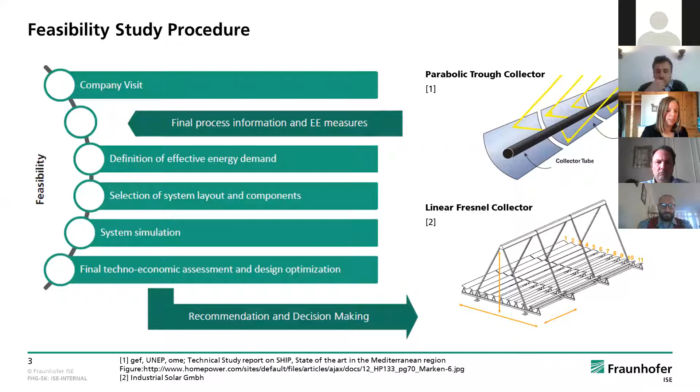We are focusing here on parabolic trough collectors and linear Fresnel collectors for concentrating solar heat, specifically for steam generation. This was being looked at in Tunisia. We had these two companies: one dairy plant in the center of Tunisia and one textile plant in the north of Tunisia. The technical parameters were actually quite similar, an annual energy consumption of 20 and 24 gigawatt hours, and 50% of this energy consumption was used for thermal processes.

The steam temperature is 170 degrees, the steam pressure 8 bar. In the schedule, there's a small difference. In the dairy plant, we had a 7-day per week operation. In the textile plant, we have a 6-day per week operation, and we will see later that this also affects the results. And a big difference is the current energy source and the energy price.

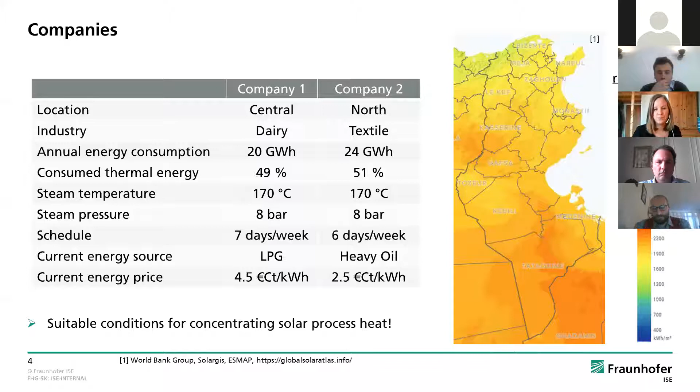So we considered a lifetime of 20 years, solar field cost of 450 euros per square meter, a discount rate of 8%. And then, and this was special to this study, we varied the amount of incentives from about 20% to 80%. So we had a lot of different scenarios for the different companies and the different incentive programs, and created analysis, like a design optimization for this.

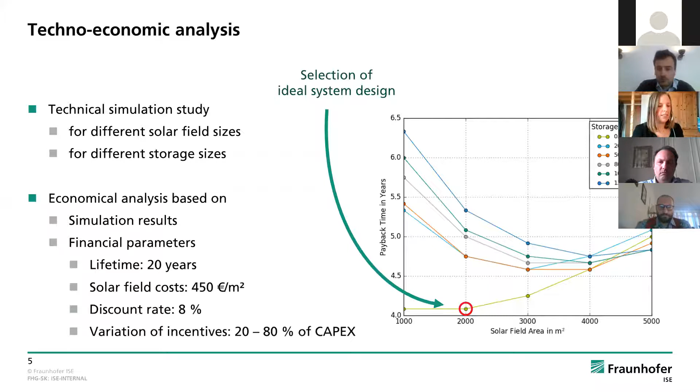And this is what you can see on the right-hand side. On the x-axis is the solar field area in square meters, on the y-axis the payback time. And the different colored lines are the different storage sizes that were considered. And with this, we could easily see in this graph what the ideal system dimension is in order to get a good payback period. And this is what we did for both companies for different scenarios of incentives. And this created a lot of different plots, and I will spare you looking at all of the different plots. I will just show you the results of this study.

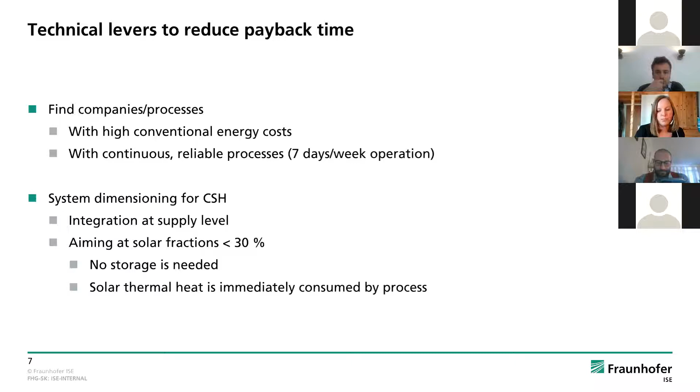Okay, so finally, Tunisia shows very suitable conditions for CSH. We see that projects are definitely possible and feasible. The payback times can also be low, especially if we consider high incentives. Yet they are often not low enough for industrial companies to really take decisions. And financial mechanisms are important to resolve the remaining risks for the company.

So this can be ESCO models. I think we will hear more about this later. Also funds that are maybe also specific to solar thermal technologies. Then we can reduce the project evaluation costs, or also create funds and programs that take over this effort. We can implement the incentive schemes as said, and the idea behind all of this is in the end to create also a larger market volume and therefore bring down the cost of CSH, and this will also of course improve the decision-making process for the companies.

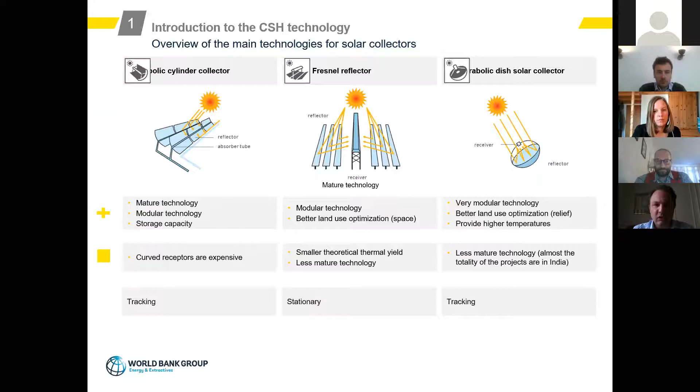I will say a few words about the way the CSP MENA KIP program captured the CSH opportunities in the MENA region. I won't go through some of these slides, which are basically just a presentation of CSH technologies. Some of these slides have also been shared earlier on in the sessions focused on Morocco, because one of our focuses was Morocco.

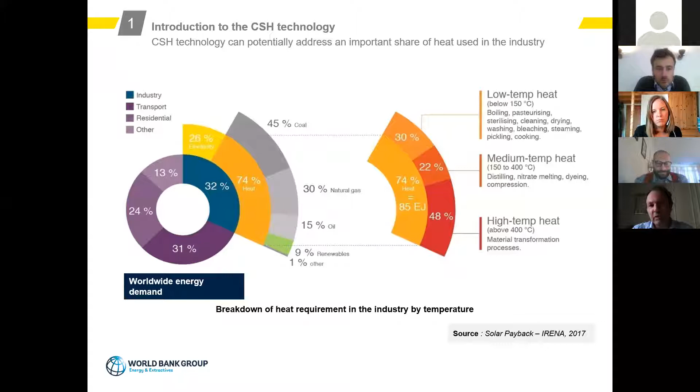But basically, in this slide, it's interesting to see that, based on IRENA's data, if you take the industry energy demand, which is basically 1/3 of energy demand, a big chunk of that is actually heat. And when I say big chunk, it's nearly 3/4. And within this heat demand, a lot is actually low temperature heat or medium temperature heat. Basically, some of the needs that can be addressed by CSH. So that was one of the driving axes in our analysis.

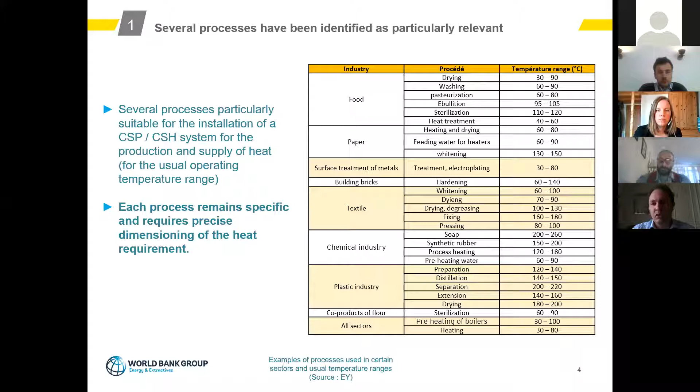What we did during the CSP MENA KIP program was to work with the countries, and I think Theda explained quite well the work that had been done in Tunisia. The idea was to look at a number of industry sectors, whether food, paper, textile, etc., based on the industry landscape of each country, to see where we could identify processes with heat needs that were compatible with CSH. So this was done in several countries, and that gave a good example with Tunisia.

Here is another example, which is more focused on Morocco, based on a countrywide analysis that we did, where we looked at a number of priority sectors, including, for instance, the food industry, the automotive industry, chemicals as well, pulp and paper. I'm giving them in a mixed order, where we identified the temperature requirements for heat processes, and then looked at what kind of CSH technologies were most adapted, whether linear Fresnel or parabolic trough, and so forth.

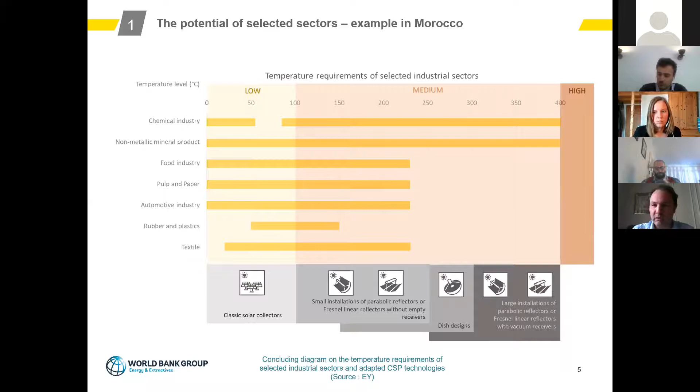So again, this was an analysis that has been done in several countries. Theda presented Tunisia, this is Morocco, but this was done also in Palestine and some other places. Here it's simply another example, still in Morocco, on the heat and temperature requirements sector by sector. And again, I won't go much in details. I'm keeping this pretty short, knowing that all the slides will be available afterwards.

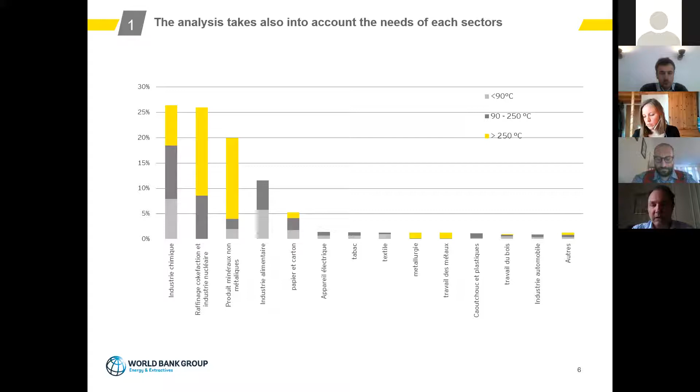But you can see that some needs are actually for rather low temperatures. Others are more in the range of 90 to 250 degrees. Others are higher. It's a pretty mixed picture, really, but showing that there are requirements that can be adapted to different kinds of technology approaches.

Here are two existing projects which have been operating for a while in Morocco. One is at COPAG, and it's a rooftop installation, which is pretty much a small scale one. And the other one is a project which is a bit larger, that has been applied to a cement factory in Morocco.

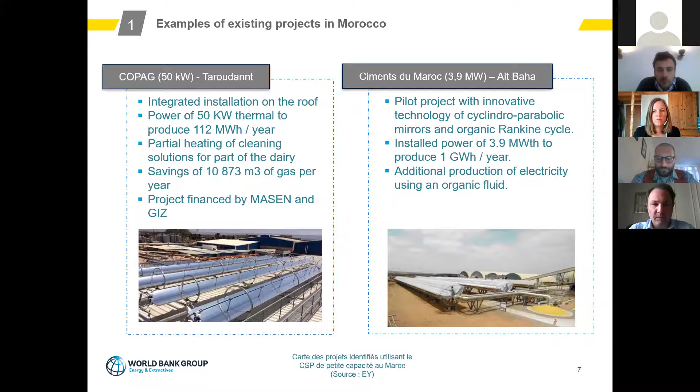If we switch to another country, I wanted to mention that we conducted a number of feasibility analyses in Palestine, and I was again with our colleagues from Fraunhofer Institute, by the way. We looked at different commercial and industrial plants, and one was in particular with a hospital in Ramallah.

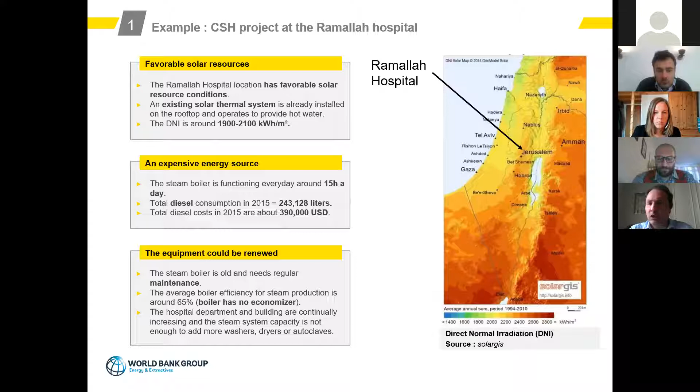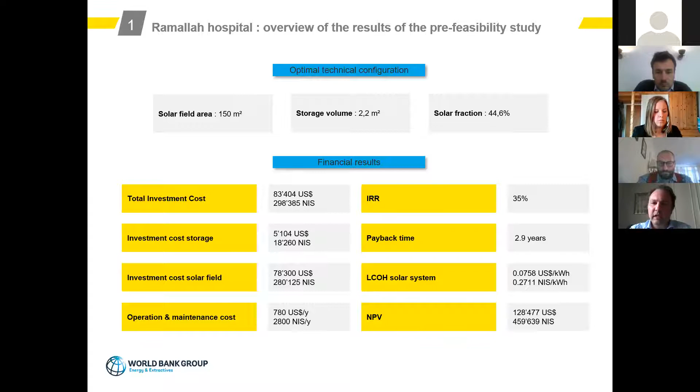Again, I'm trying to extract some of the key findings from the feasibility analysis, but to picture a few items, based on our analysis, we identified an investment cost which was a bit below $100,000 with an IRR of 35% and a payback time of a bit below 3 years. So that's just to give you some indications on the type of projects that we have looked at and the type of key figures that came out of these analyses.

This means that for this type of project, beyond the economic incentive, we consider that 45% of the fuel consumption could be saved, and that's basically over 100,000 liters of diesel savings each year. This also means that you get significant CO2 emission reduction, reduction of SOx, NOx, but you also contribute to local economic development, maybe on a small scale, but still, it's creating jobs and revenue for suppliers in the supply chain.

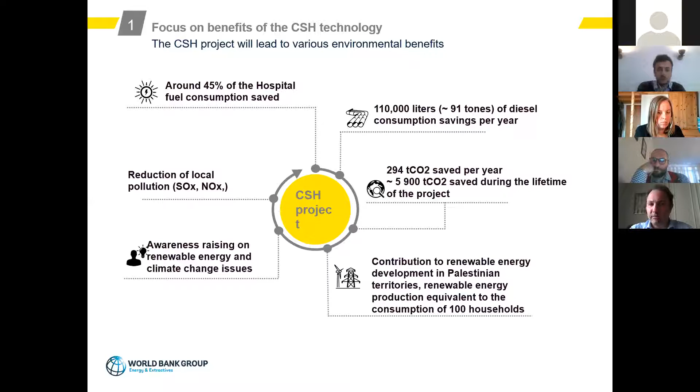Although there are a number of projects that exist, and we've had examples earlier on Jordan as well, there are a number of barriers that face deployment of these projects. A major obstacle that we've encountered is the question of awareness over CSH technologies and their performance. There are not a lot of key projects that can provide examples of success stories and basically inspiration for a number of industrial and commercial customers.

As you know, in the region, many companies are rather small companies. There's a lot of SMEs. It's a rather fragmented sector, the industry sector in most of the MENA countries. And for that reason, the level of investment is always quite critical. So we have looked at rather small investments, but even investments in the range of $100,000 can be quite a major step for the CEO of a company.

So there's really a barrier: presenting a project that is a small capex, that has a very good IRR and a small payback period, but still, the CEO of the company will be very complicated to convince. He will need guarantees on the performance of the system, on the choice of allocating capital rather than to improving his marketing or other aspects. Dealing with energy processes is not something that they master. They don't necessarily have an energy specialist, and so there are a lot of problems around convincing the CEO to make the decision, to put it very simply.

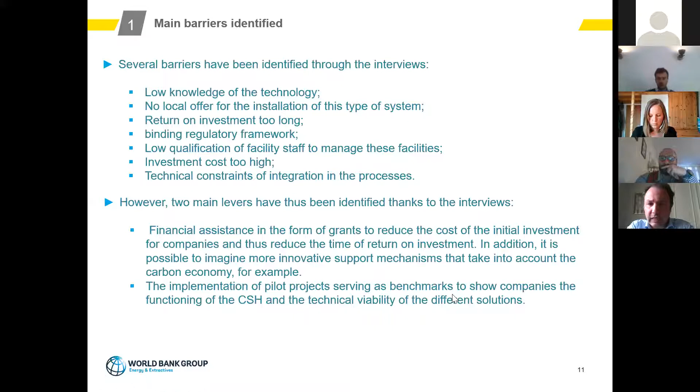So for that reason, we understood that having a grant component could be useful on one hand to support feasibility analysis, and some were financed by the program in different countries, but also an investment grant component, and that's what we did with the small grant program. And I'll say a few words about that right now.

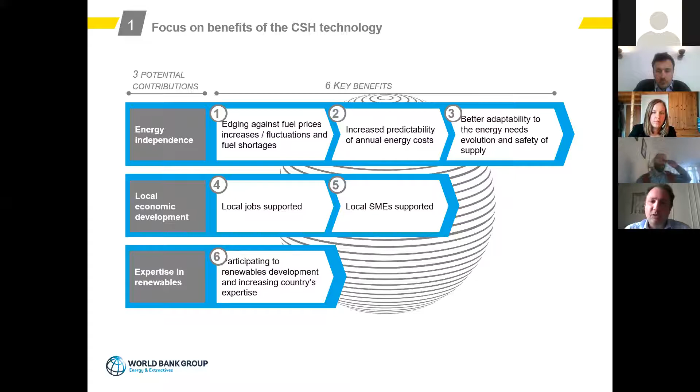Perhaps before I mention the small grant program, very quickly, the reason why we went ahead with that was that CSH has many advantages. It can really play a role in the energy independence of a country, applied to the industry sector. It provides the industrial consumer with better visibility on energy cost, better adaptability to energy needs, etc. There is obviously a local economic development component, because this can support local jobs and a number of local suppliers, and this is going to grow expertise in renewable energy that can be deployed also to other sectors.

Now, on the small grant, as you understand, we deployed this small grant in Morocco. The solar cluster has already mentioned this earlier, so I'll be quick. Basically, we set up a program in a call for projects mode in partnership with the Cluster Solaire in Morocco. We reached out to industrial or commercial companies. The need was to have 50% ownership locally, to really target local companies, with possibilities to include as partners engineering firms, experts, developers of technologies, and so on.

We focused on projects of rather small capacity for demonstration purposes in an industrial context with thermal or electrical applications and without any restrictions in terms of CSH technologies.

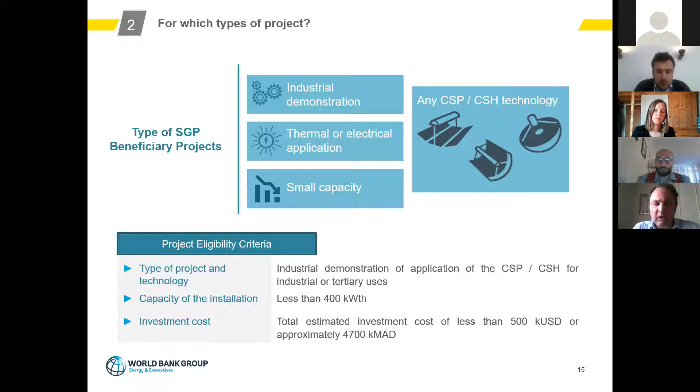And we were targeting projects with initially, basically, a maximum of $500,000 of capex, just as an estimate. Obviously, this was an indication, but that was how we built the call for projects. And in the end, we supported a project to produce bitumen.

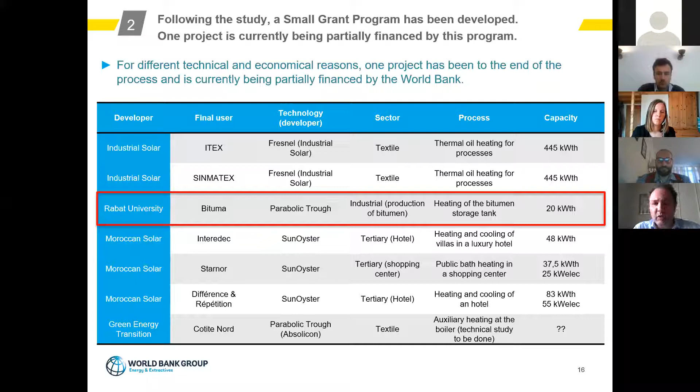And again, I think that's been mentioned a bit earlier. We had one of the partners of the project speaking as well. So this project is being launched, which is a good thing. We had other discussions which were very advanced in the textile sector, but unfortunately, since we were expecting a participation also by the industrial company, in these cases it took too long to get the sign-off from the industrial partner, and that's again one of the barriers that we're facing in this market.

And so just to finish, I'd just like to mention that we think CSH can be very attractive from a financial perspective. Again, there's a lot of energy savings to be brought. Projects can have very good IRRs, and it's a very good hedge against possible fluctuations of fuel prices. It also has some strong environmental benefits, not only on greenhouse gas in general, but also on local air pollution, which, as you know, is quite an issue in a number of cities in emerging markets.

And it's also pushing the development of small scale or medium scale renewable energy. And last but not least, and we really think it's important to mention this as well, there are industrial and economic benefits, because a number of components can be manufactured locally and can fit quite well with the metallic component industry that exists in most of the countries that we've worked with, as well as the electrical component industry.

So we really think that there's a trio of strong benefits. The thing is, we need to have key success stories that we can build on to better promote this type of projects. That's it for me. Thank you.

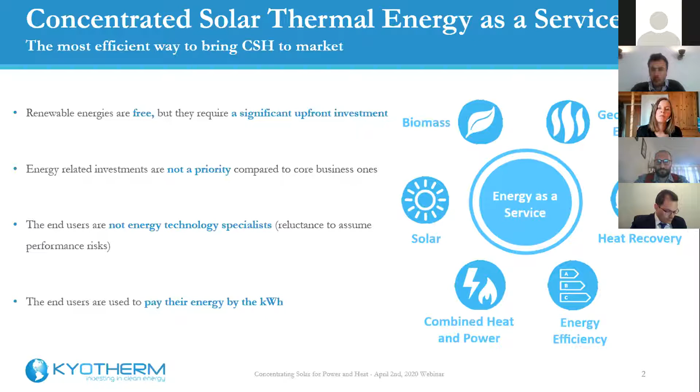One other really important topic is that it is, of course, very good if you come to an industrial client and tell him, I will take care of the investment and sell you the energy, but you also have to have a competitive cost of energy, because if you come to, let's say, a dairy site and tell him, I will sell you solar thermal energy, but it will cost twice as much as what you're already paying, then of course this will not be a big success.

And what we want to stress is that to really have a competitive cost of solar thermal energy, one important issue is to really optimize the cost of financing. I think one very good example everybody has in mind is the PV industry.

PV at its beginning was very costly. You had prices, which were feed-in tariffs, at 500 euros per megawatt hour. And what has really helped PV become cost effective is optimizing every cost, and financing has been one of them. And now when you look at the PV industry, financing is kind of a commodity.

It's very cost effective. And what we intend to do at Kyotherm is apply the same for the solar thermal industry, meaning having a very optimized cost of capital to lower the cost of energy and implement as many projects as possible. But in order to do that, you need to have a very good understanding of each project's risk and be able to allocate the different risks of a project to the different stakeholders of this project.

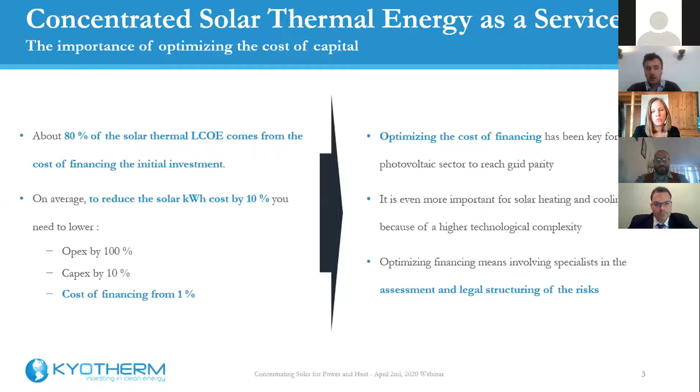So this is what we typically do at Kyotherm, which is an investment company specialized in renewable heat projects. It was founded in 2011, and at the beginning we were mostly investing in geothermal and biomass district heating projects, and lately have had a closer look at solar thermal projects, which we think is a very interesting industry and which can really develop on a worldwide basis.

So we typically invest in projects that can be around 10, 20 million dollars in size. But we know that a lot of solar thermal projects are kind of small. So we can go down to $500,000 in terms of project size, even though from our experience, in order to have ESCO projects which are cost competitive, it's better if they are a little bit bigger than this.

Regarding solar thermal projects, we are based in France, in Paris, but we have a worldwide approach. We really want to finance projects all around the globe, and of course look at the geographies where you have the most sun. And what's also to stress is that we have our own institutional investors, so we finance projects ourselves. We're not an advisory company.

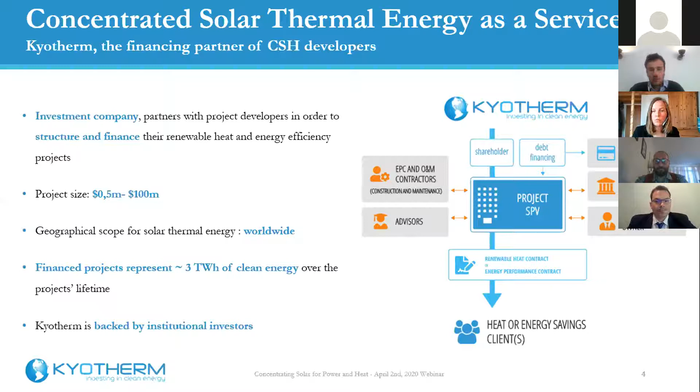And so all of this is to be able to team up with any project developers in the concentrated solar thermal industry that have a project, that have a client which thinks the project is relevant, but the project is not going forward because of financing issues. So ourselves at Kyotherm, we are not a collector manufacturer, we are not an EPC contractor or O&M operator. We really are just focusing on the financing aspects and teaming up with developers in order for projects to really get implemented.

So, in a nutshell, of course, Kyotherm as an investor will in all cases bear the risk of the creditworthiness of a client, the risk that a client can close down its plants, as well as the solar irradiance. And then all the other risks are shared or taken by other stakeholders, being the EPC contractor, O&M operator, and the heat user. And of course, it makes sense, the less risk we have on the project, the better the price or the cost of capital can be on each project. But that's really an evaluation that we do on a project by project basis.

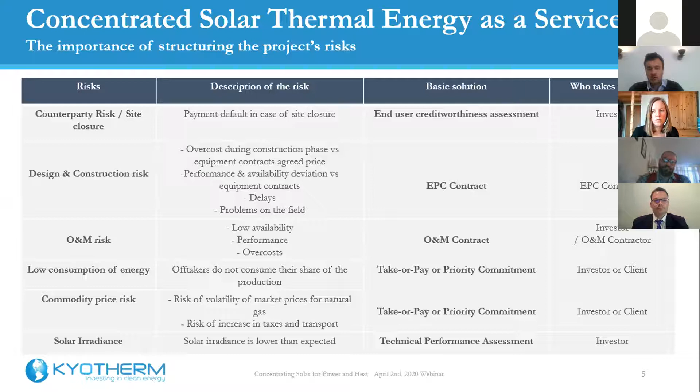And so to illustrate what we are doing, sadly, we are in discussions on concentrated solar thermal projects, but I've not signed one yet, so I couldn't present one to you today. But I could present one project we have financed with flat plate collectors, which is a 14.2 thousand square meter project for a malting plant, currently being built in France, which is roughly 6 million euros. And what's interesting to see is that we really tried to have the most optimized cost of financing so that this could be of interest to the clients.

So we financed it with a roughly 5% project IRR. And what's also interesting is that we have a 20-year contract, which really allows us to decrease the cost of energy. Meaning that we, Kyotherm, also take the risk that these plants may close down before the 20 years. But that was really important in driving down the cost of energy. And we've also worked with a bank at a later stage, but we have financed 100% of the project with equity as of the construction start.

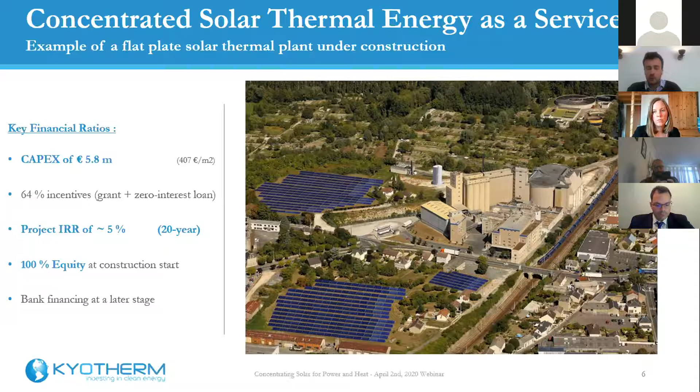With this, I would like to go to the questions, to the Q&A session. We have received a couple of questions online. There are some questions that I would like to ask as well. I think we'll start with the ones that we have received from the audience.

But before that, I'd like to briefly tell you about the industrial decarbonization program that the World Bank is currently running, and it is with us, with ESMAP. We started the program this year. We launched this industrial decarbonization program, which is integrating the current work streams into a program focused on technological innovation and piloting in the World Bank Group client countries.

The program will be supporting both the global knowledge as well as providing country grants for market assessments, support to enabling environments, pre-feasibility studies, support to piloting of innovative technologies that could be assessed both by the World Bank as well as in partnership with the International Finance Corporation, the IFC. So yes, with this, I would like to go to the questions.

So there is one question from the audience asking how are the World Bank and other multilateral development organizations and banks going to use the industrial decarbonization program of the CTF to develop large-scale concentrated solar heat projects? I'd like to answer this one from our perspective.